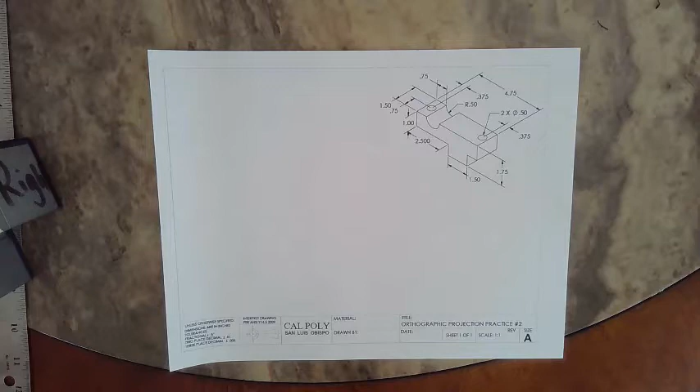This part can be fully displayed using only 2 views instead of the standard 3. So we have our part here. We are given the isometric view again. And again, this view tells me this is the front face, this is the top, and this is the right.

We only need the front view because it gives us all this detail. And we need the top view because it gives me these holes. I cannot dimension to hidden lines, so the front view and the right view would not allow me to fully dimension these 2 holes.

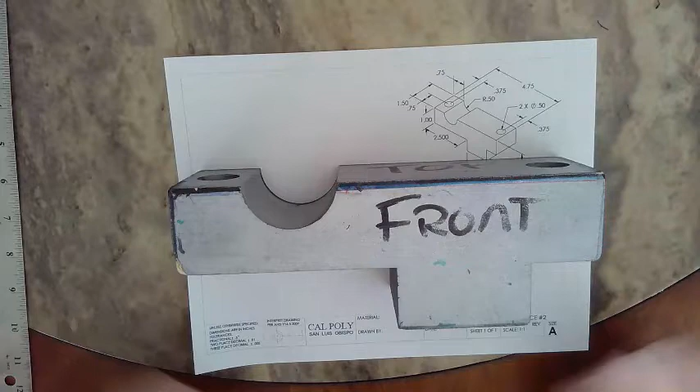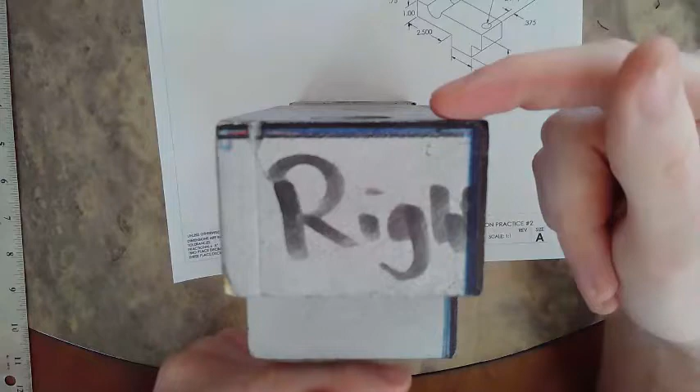Again, we're sticking with the ANSI standard, and we're going to project it using the glass box or the roll method. So if this is my front, I roll it up the side. This is my top view. And I do not need the right view because this view does not give me any extra information. It would give me a depth and a height, but I can get the height from the front and I can get the depth from the top, so the right view is not needed.

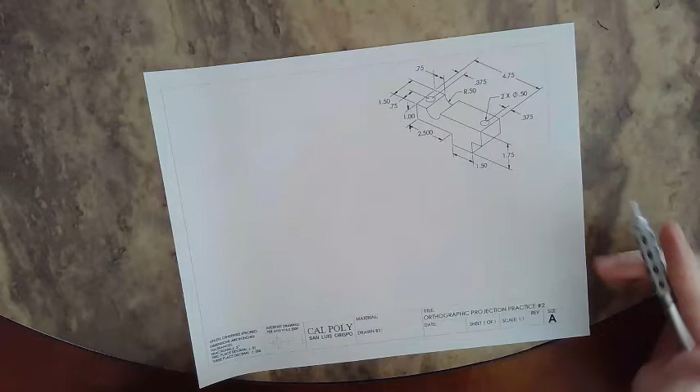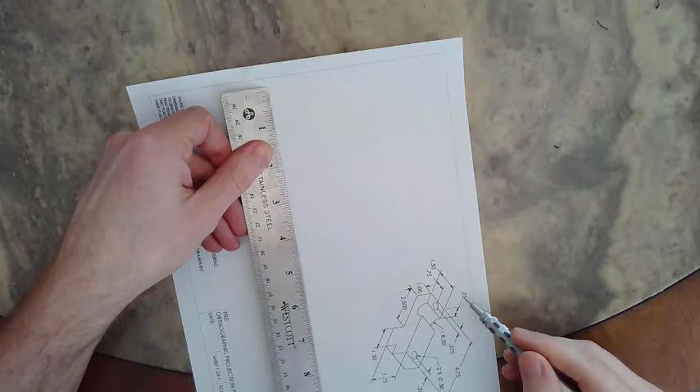So to start, I'm going to start with the front view here and then project it up and do the top view up there. So it is 4.75 inches long. I'm going to start with all visible lines first. How tall is it? It is 1.75 inches. So I'm going to start right here. And I'm going to do 4.75 with a break of 1 inch, 0.75 in.

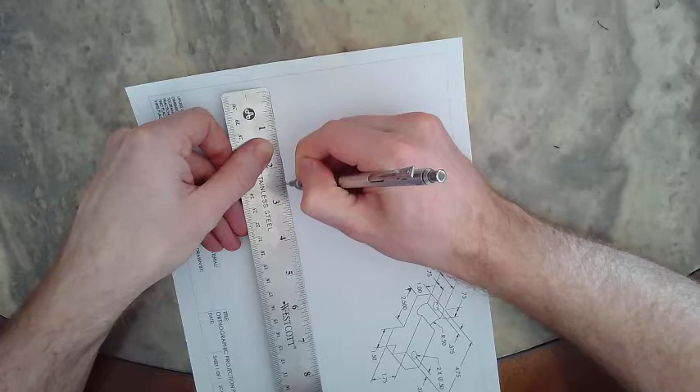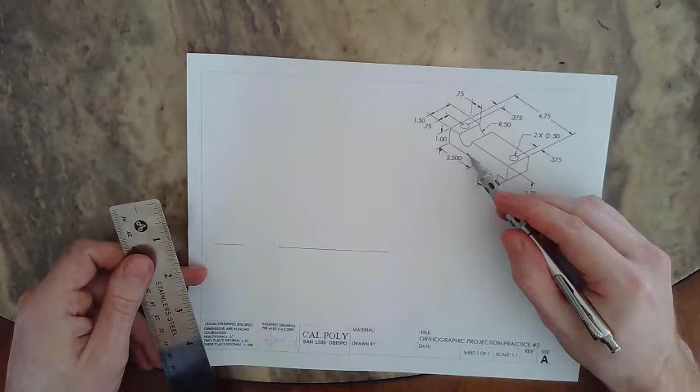So I'm going to draw my line, 0.75, and then skip 1 inch, and then continue on to 4.75. Right there. So from there, I'm going to draw the height, go down 1 inch and over 2.5. We can assume this shelf is the same height as that one. So then I'm going to take a break for 1.5 and finish it off.

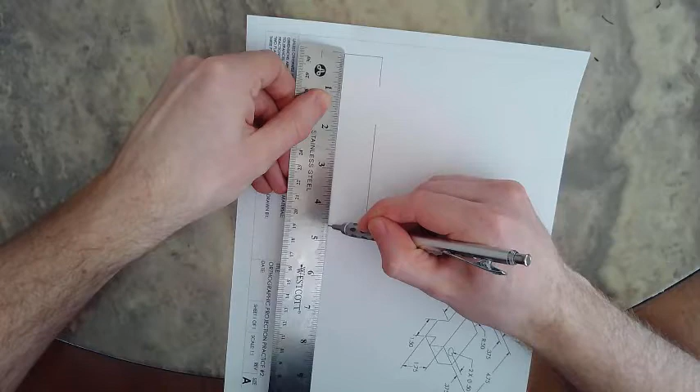So I'm going to drop down 1 inch here. And I'm going to come over here, a distance of 2.5, and then a 1.5 gap, so 1.5, and then a 0.75 distance shelf right here to there. And I add this line here. So again, I'm drawing all visible lines.

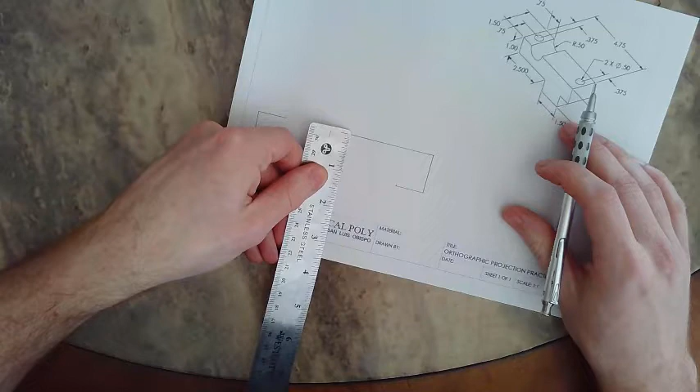This gap drops down 1.75. So I have my 1 inch right here. And I'm going to drop down another 0.75 right here, on both sides. 1.75. And this distance was already determined. It measures 1.75.

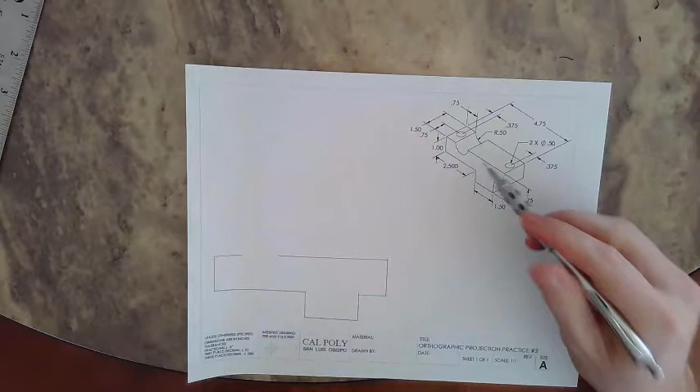So from there, we need to do this radius. So this radius is 0.5. Take my circle template. And I'm going to find my diameter of 1 inch. Right here. And I'm going to just line this up right here. My tangent edges, and complete it. So there is the completed front view with all visible lines.

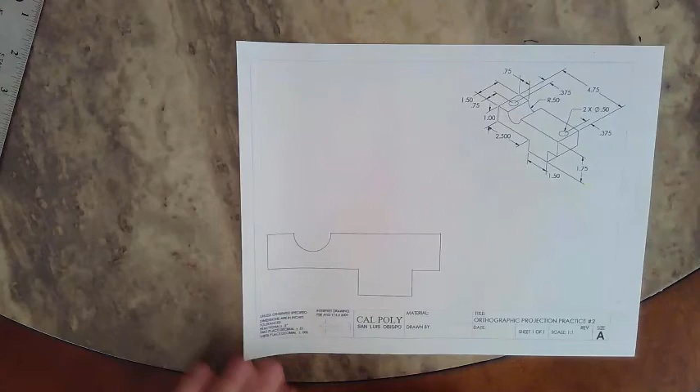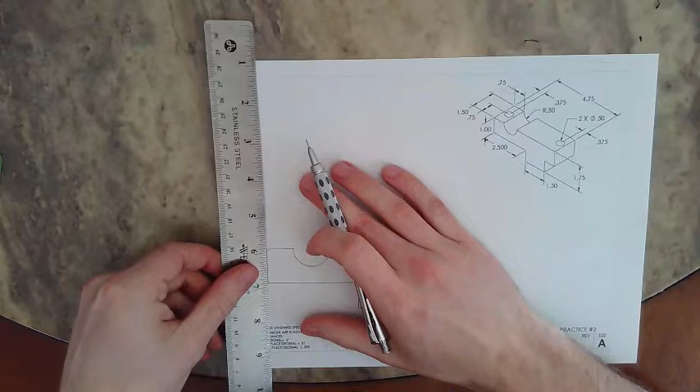Next, I'm going to do the top view. So I'm going to project it straight up. So this is my front. I'm going to roll it up the side, and it's going to basically be a giant rectangle. So the rectangle with a height of 1.5 right here, and a length of 4.75. So I'm going to line up my ruler right here. I'm going to come straight up. And I'm going to put dimensions between them because that's what the contour rule says to do.

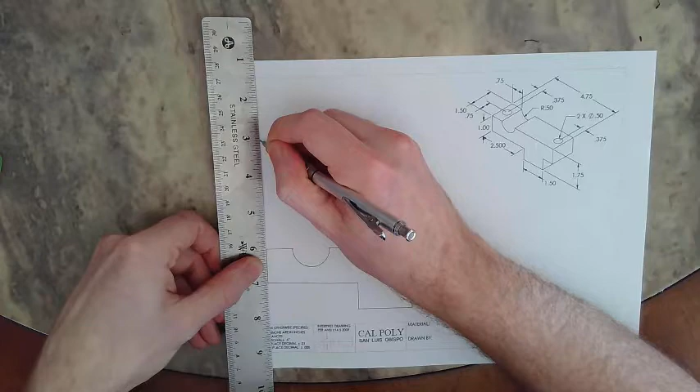So I'm going to come up here and draw a line that is 1.5 inches tall. 1.5 inches there. That was at 5.5. So I'll come over here, do that same line again from right here, 1.5, and this will give me the length of that 4.75 right here. So there are my two views.

On the top view, I have additional visible lines for this radius. So I'm going to have two lines there, and I'm going to have these two holes visible. So these two lines can be projected straight up from my bottom view here. Or I could have measured it from the side here, which is that 0.75 measurement.

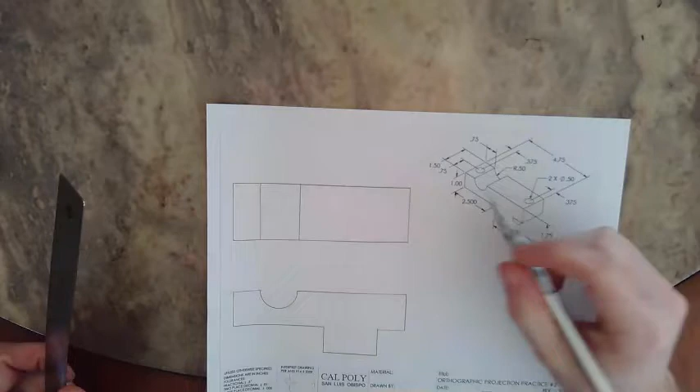So from there, I need to locate my holes. So my holes are 0.75, which is half of 1.5. So they're centered on this view. And they are over 0.375 for the center of that one, and 0.375 for the center of that one. And it looks like the diameter is 0.5.

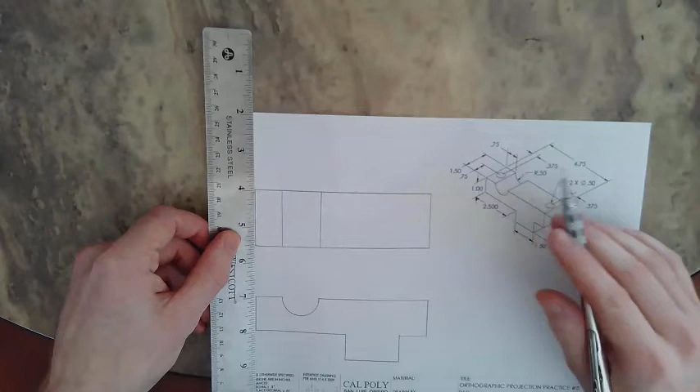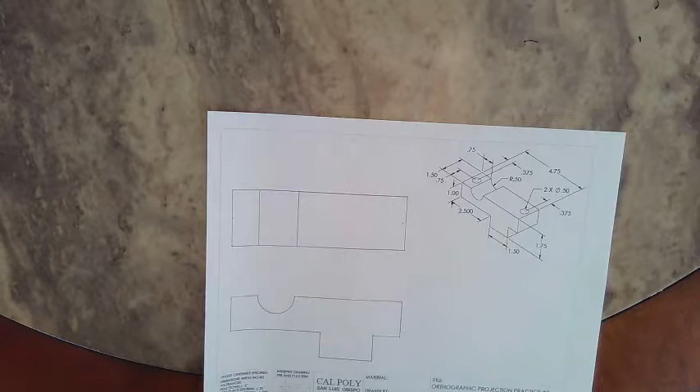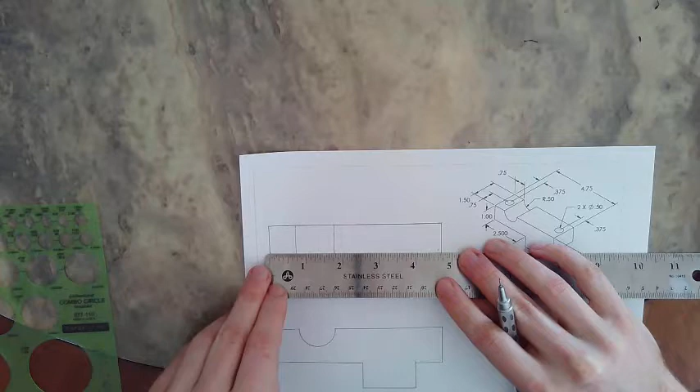Okay, so now I have my x-coordinate right here, which is 0.375. So I put my ruler here. I'll mark it on both sides right now since I'm here. So 0.375 is going to be right here. So that's the center of that hole. And then same deal over here.

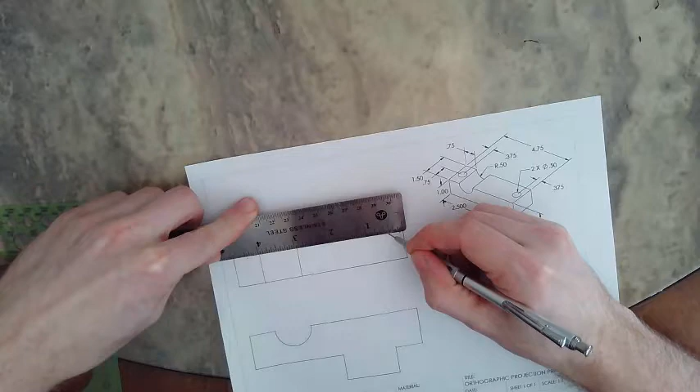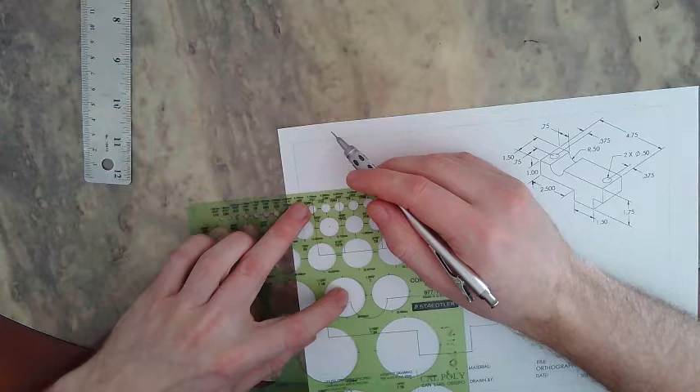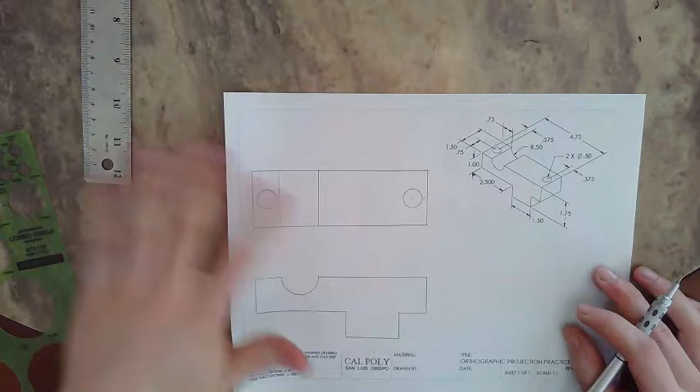So I have my center points marked for my holes. I can then take my circle template, find my 1/2 inch hole. So diameter of 0.5 is right here, I believe. And I can draw my two holes. Line it up. There are my two holes. I believe that is all visible lines drawn.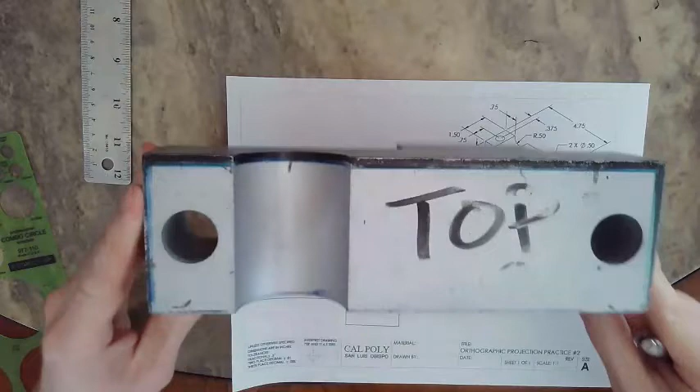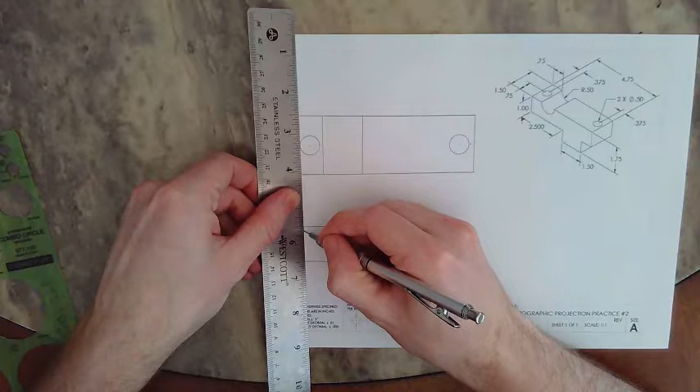So from there, we're going to go do my hidden lines. Remember, all features that are not visible are still here. So I have this hole right here and this one for my front view. And my top view will get hidden lines for this bottom nub. Because it still exists, I still need to show it. So for those two holes, I'm going to project it straight down off of my top view here. And I'm going to do hidden line. Remember, hidden line is thinner than visible and it is equal dashes.

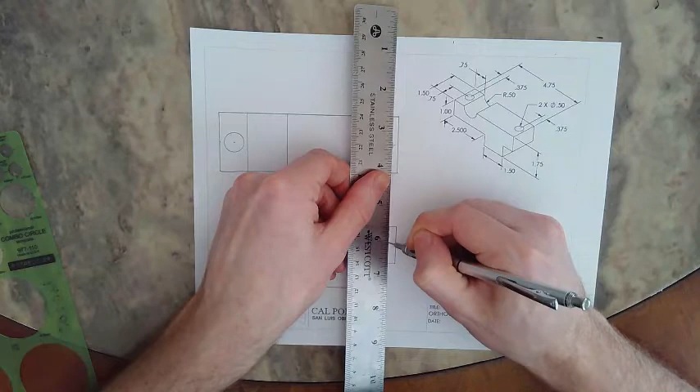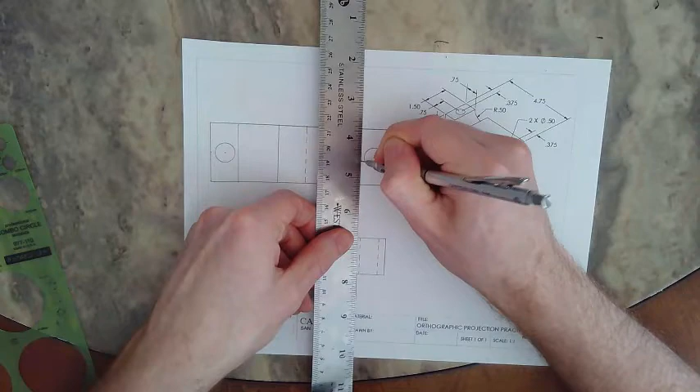From there, I'm going to do the hidden line for this feature up here. So again, I extend it straight off of this bottom view here. So that should be all hidden lines and visible lines. Next, we're going to do center lines and center marks. So remember, all circular features get a center line and a center mark. I'm going to do center lines first.

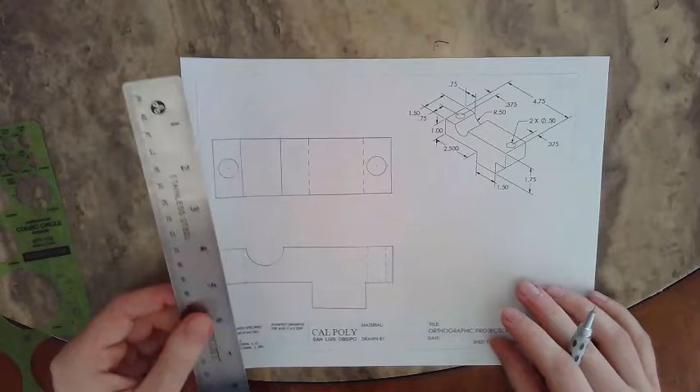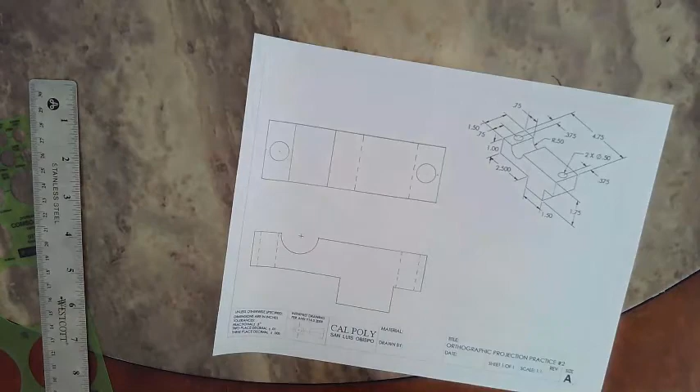Actually, I'm going to do center marks first, so then I can extend it to do the center lines, make life easier. So I'm going to do center marks for this hole first. So remember, it was a 0.50-inch diameter. So that means my center point is at a hash. Now for this hole, since it is not a complete circle, the only center mark portion that's needed is the very middle of it, and that's to make dimensioning a little easier and to show it is a circular feature. I do not need to add extensions to that feature.

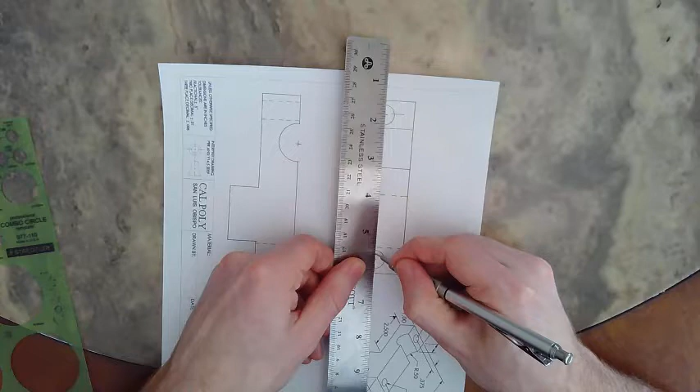From there, I'm going to do these two holes up here. So there are my center marks. Next up, I'm going to do the extensions off of those center marks to complete them. There are my center marks.

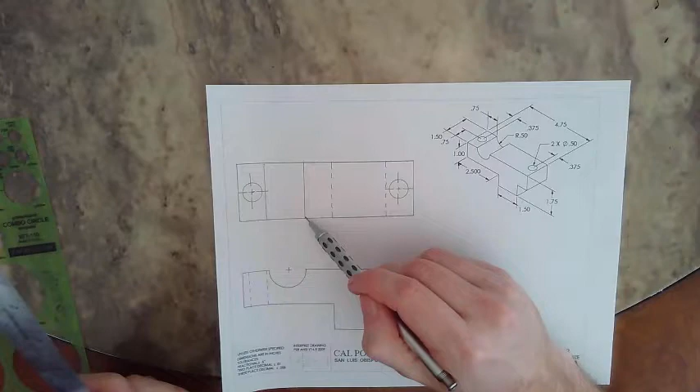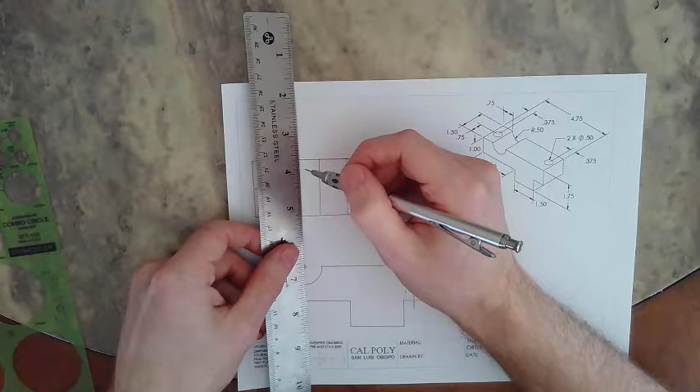Now for center lines, I need to do center lines for all hidden features. So these two get center lines. And then since this is a circular feature, this will also get a center line. Remember, center line is long, short, long, and it extends past my part. And then for this one, it comes off of right here. And that completes all visible, hidden, center marks, and center lines.

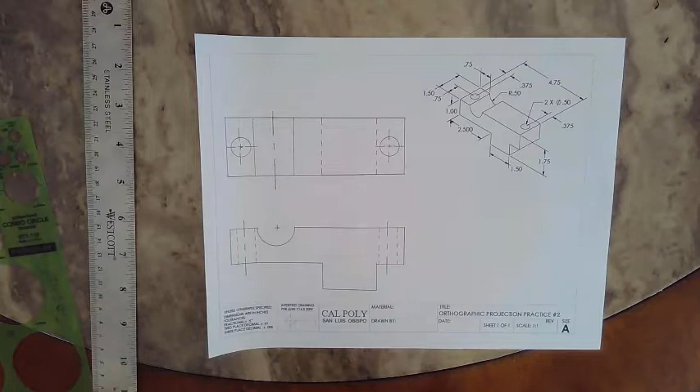Now, we're going to go ahead and dimension it. So I'm going to start with the overall block dimensions. First, I'm going to do the overall width right here, the 4.75. I'm going to do it off of the top view. I could very easily do it with the front view. It's not much of a difference.

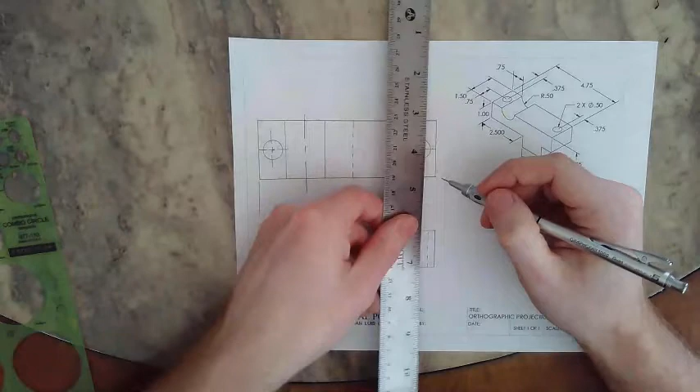So I have my extension lines that do not touch the part. And they locate the dimension. So those are my extension lines. Next, I have my dimension line right here. Goes across the part. I'll leave a gap for my dimension. And that measures 4.75 inches.

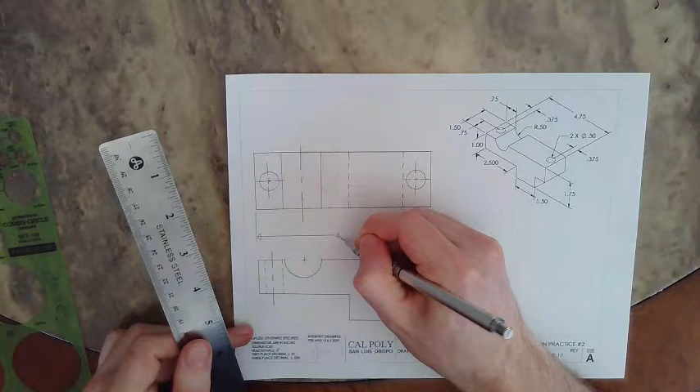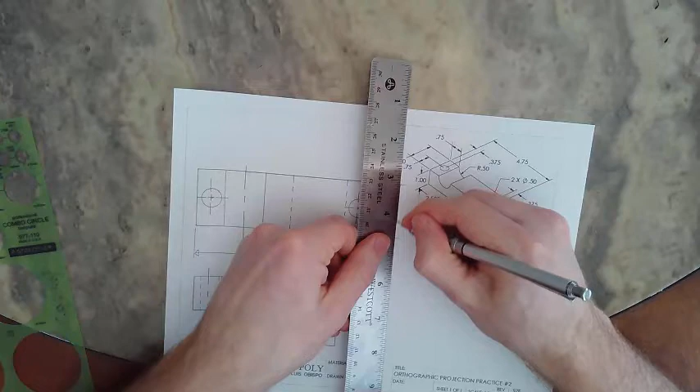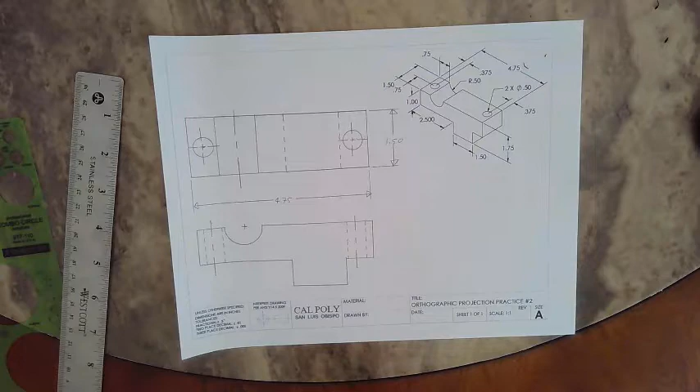So those are my extension lines. This is my dimension line here with my arrowheads, and I'm going to make a little break in it. Throw my pencil around for that 1.5 inch right there. So after that, we are going to do the height down here of that 1.75.

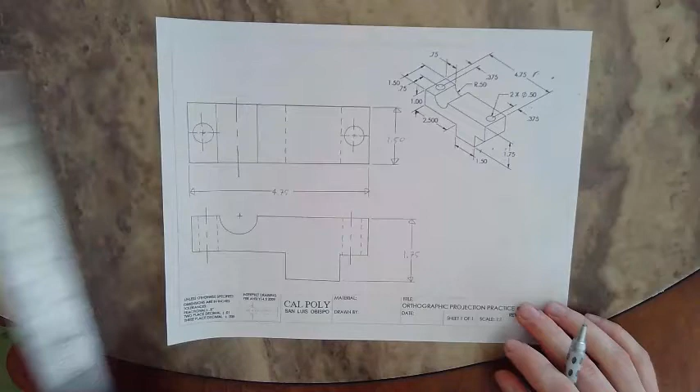And it's a good idea to have a big eraser. So you come in, even up your lines, make it look nice. And this is 1.75. So I have the overall block dimensions placed now.

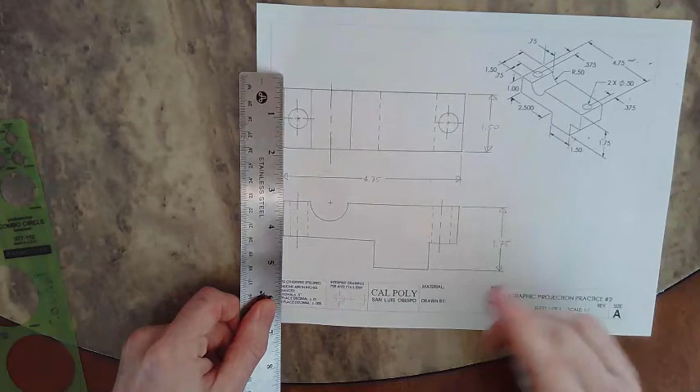Next up are going to be the holes. Well, let's do the features first. So I'm going to do this feature first. So I need a length from here to here and here to here. So I'll draw an extension line down here. I'll try to put them in line to make it look neater, but it's going to get me close down here.

There is a thing such as over-dimensioning. So right now I'm placing these two dimensions, and I cannot place a third dimension right here because that would conflict with that 4.75. We do not want conflicting dimensions.

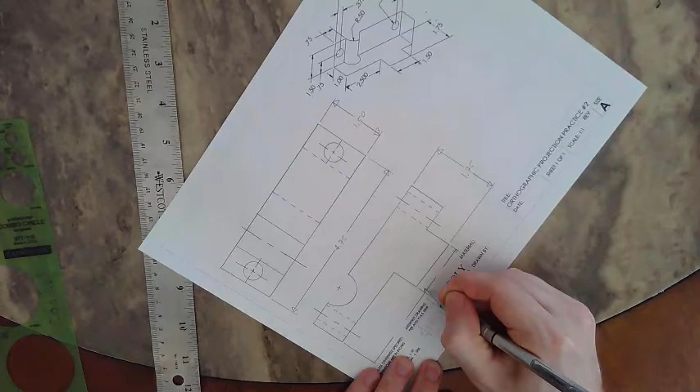So this distance was 2.500. And for some reason that's 3 decimal places, so that might be a more critical feature. It has to be a tighter tolerance according to our title block down here. This one was 1.50. Then I need a height for it.

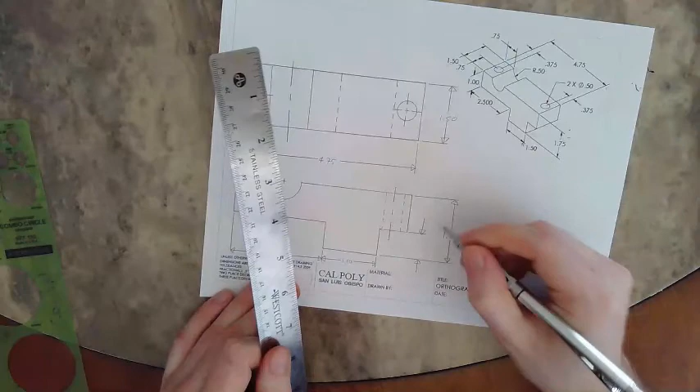So I can squeeze in the height right here by sharing extension lines. And that height was 0.75. So that covers all those details.

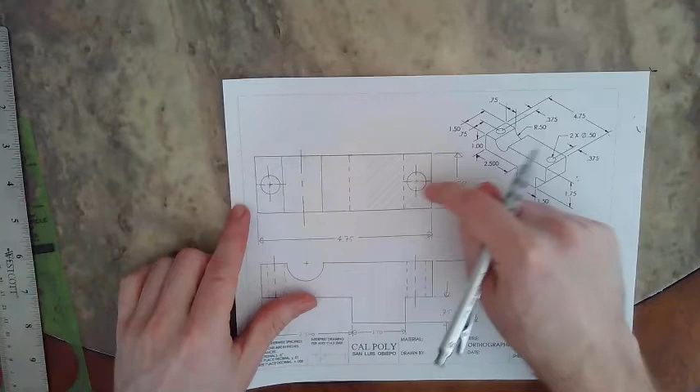Next, I'm going to do holes. So I'm going to do hole locations first up here. I'll locate this hole to this hole, and then to the side, and then I'm going to do one height. The center lines are enough indication to show me they are on the same plane. I'm going to place this dimension below and above that. So right here, I'm going to delete this center line a little bit because I don't want to cross.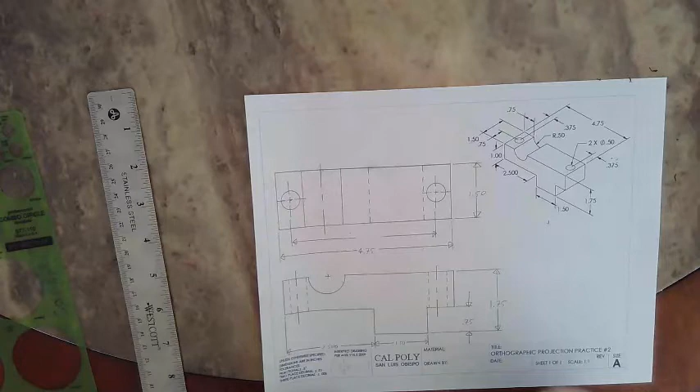Make sure your spacing between your dimensions is as even as you can to make it as clear as possible what's happening with the drawing. So that's 4 inches. Now I'm going to locate to the side right here. I can share this dimension line and just draw another arrow right here and indicate that that is 0.375.

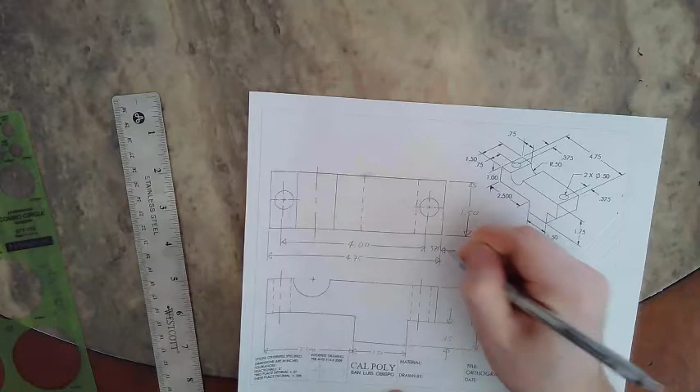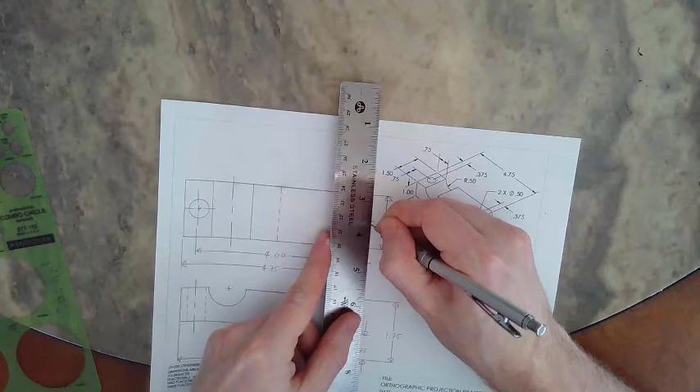Next up, I'm going to put a height on it. So I'm going to place that dimension right here. And that was 0.75, so that should fit normally. All your dimensions should be the same height as far as the text goes. And so that fully defines location of those holes. Next, I need location of this hole, then diameters, and that'll complete it.

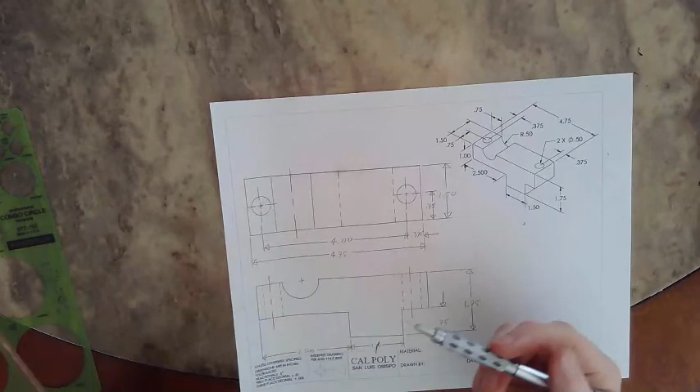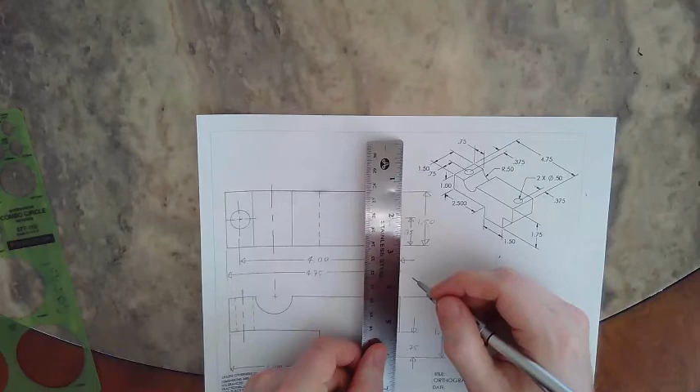So for locating this hole, I only need an X dimension because this center mark shows me it's in line, which means it is a half of a circle. So all I need is one dimension right here, coming up off of that center mark, but not touching it. An extension line over here. And then some dimension lines right here show me where it goes, and that distance was 3.5.

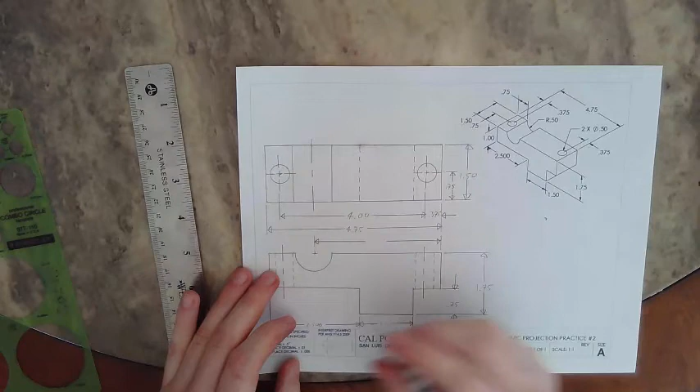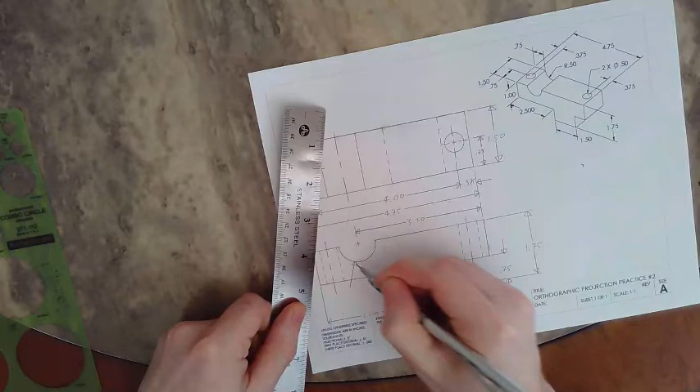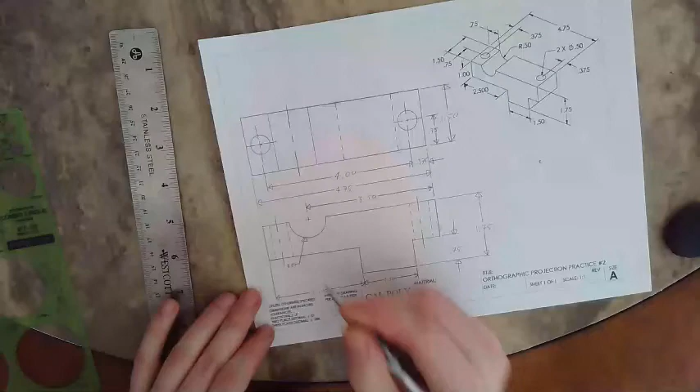So all that's left are diameters for these two and the radius for that one. So I'm going to do radius first because it's easiest. I'm going to come off at an angle with the dimension line pointing towards the center. Then I'm going to go straight. Then I'm going to write it right here. I'm going to shorten this center line to make it look a little neater. And that is a radius of 0.5. So I did a radius versus a diameter because it's not a complete circle.

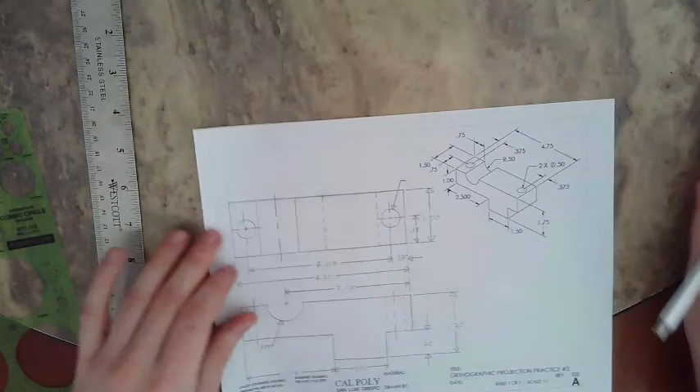Up here for these two, they're complete circles. So I'm going to come off at an angle off of the center there. I'll come up to here. Remember, if it has an arrowhead, it touches the feature. I'll do a straight line there. I'm going to write 2 times diameter of 0.5 through. So 2X diameter of 0.50 through. I cannot fit it on one line, so I put the through underneath.

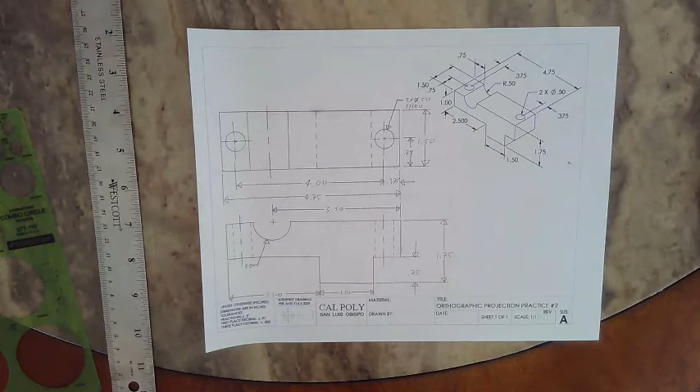That's fine. All that is left here is to fill out the title block completely. So material would be N/A. This is just a drafting practice, not applicable. Drawn by, I'm going to write my name, all capital letters. Date, I believe it's the 28th. Revision A. And that is completed.